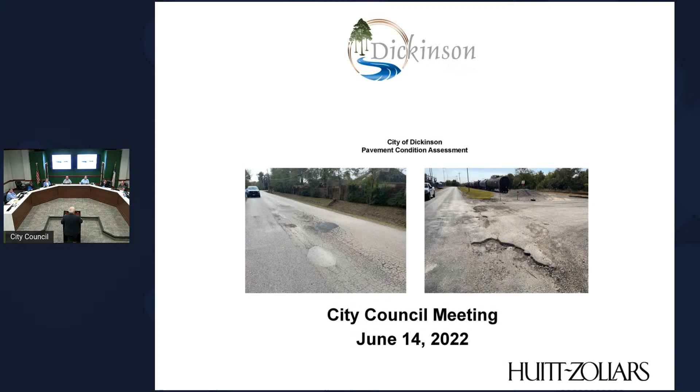The agenda: I'm going to cover basically the scope we were tasked with, talk through the scientific way we approached this and how we developed the city's deferred maintenance program currently on your roadways, how we then structure that in terms of planning a 5 or 10-year capital improvement plan, and how we would fund that based upon a life cycle analysis. I won't bore you with a lot of details, but let me tell you why this is really of the utmost importance.

Number one, you want to get your streets in the best condition you can afford for your residents. Second, the reason you need a program like this: I have dealt with FEMA here in the Houston area for the past 30 years, wrestling with them after disasters, whether it be the record flood in '94 up on the Lake Houston Dam, or Tropical Storm Allison, or Hurricane Ike and Hurricane Harvey. And the first thing they always say when you sit across the table from them is, prove to me what the condition of your facility was before the event occurred. That is the hardest thing to do, and honestly, that's kind of their way out of funding any improvements.

I worked with a gentleman who came to work with me, Joe Myers, who was a client for 25 years at Harris County Flood Control District. We used this same program on flood control infrastructure, 3,000 plus miles of channels, and we were able to develop what the condition of those channels were. When we had follow-on Ikes and other storm events, we got money from FEMA because we could show them what the condition of those assets were before the event and what they were after.

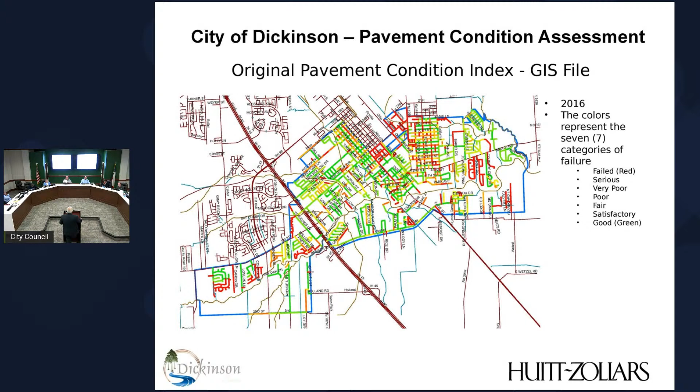You can see in '16, green was considered acceptable condition, and red was the failed condition.

We then took all the information, and you can see there's a pretty substantial change in the green. That means in those 5 years, the city did a lot of good work to improve the condition of the streets. So we updated the database, and then we went out.

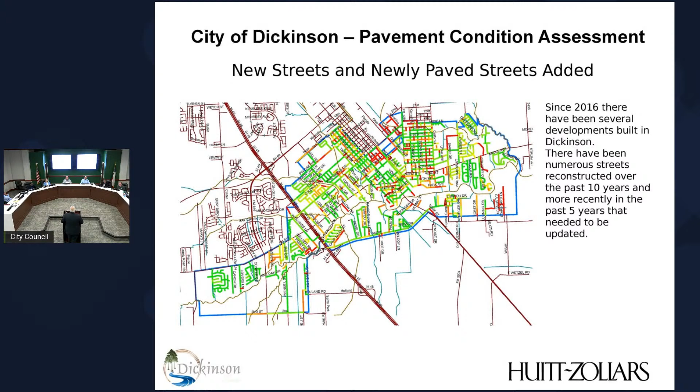In November, we then started taking a real deep dive into the streets and identifying which ones still needed to be reconstructed.

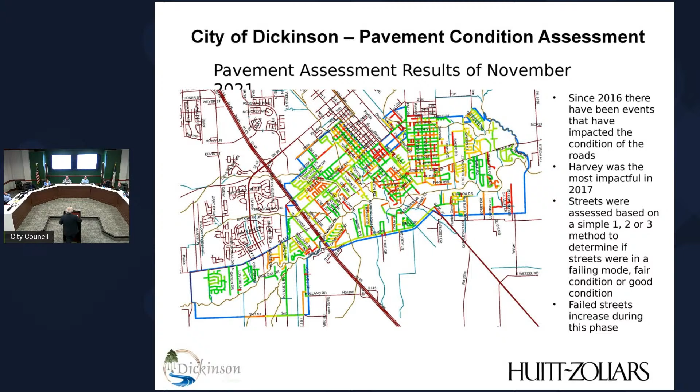The other item that we did: some of the streets that did not need to be fully reconstructed still had potholes and other deficiencies, spot repairs that needed to be done. So we went out and identified those deficiencies and created individual deficiency reports.

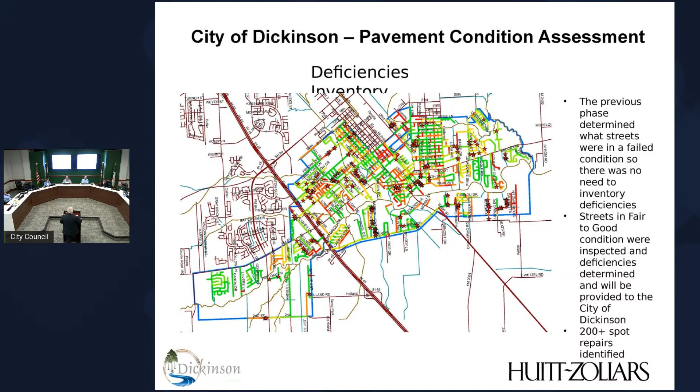Now, the nice thing about this is your staff can use these and actually create bid items for contractors, and they can go out and repair these, or the city staff can do that. The thing is, we have a record of the improvements that are being made, so when we get back with FEMA and we have damages, we'll be able to show that things have been repaired.

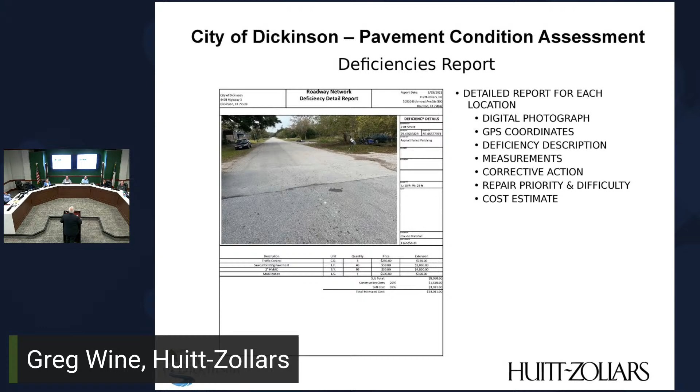We did this pavement assessment system on an iPhone, and we have since given that application to city staff. They can go out and update existing deficiencies as well as identify new ones, all done with a little pull-down app on their iPhone, and they're all able to do that now, giving us real-time information.

And the nice thing is, once they're repaired, the inspector can go out and say that has been completed. So it gives you that record again that we go back to FEMA to say we have been maintaining our assets.

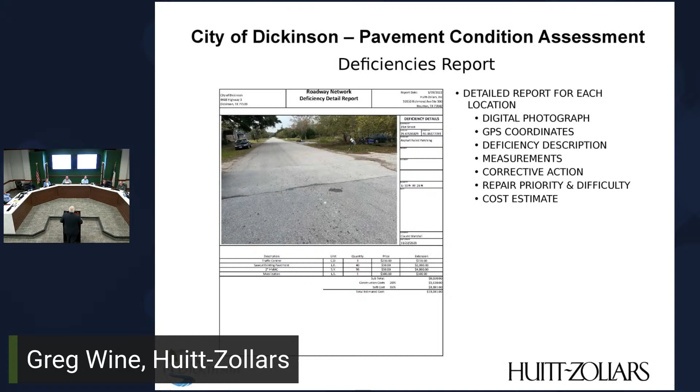Now, having arm wrestled with contractors over the past 5-6 months with what's going on in the economy, your value has probably gone up. But so has the value for the deficiency. So comparatively speaking, you have around $200 million in terms of value for your roadway asset.

You take the 192 and divide it into 84, and it says that right now the roadway condition index, in other words the status condition of that asset, all the roads, is about 43.7, which means it's around 43.7% deficient. So what this does, it at least defines the challenge that we have in front of us.

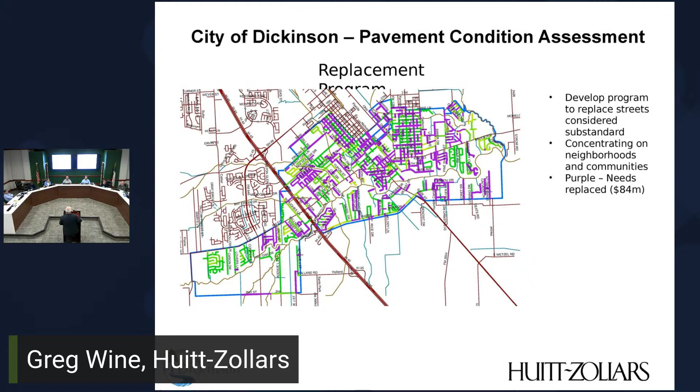And we're doing that right now, sitting with Theo and Chase and the rest of the staff. We have these projects, these roads, which are all purple, currently under design, and we're going to look at getting those prepared for construction and funding as monies come available.

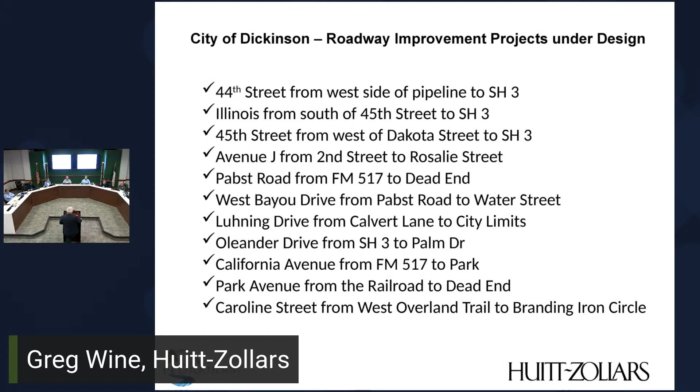So with that, that concludes my presentation. I'm welcome to answer any questions you may have. Does anyone have any questions?

No question. I just want to make a comment having to deal with FEMA on the Galveston County Long-Term Recovery Group.

I concur with what you said. Watch FEMA deny many a city because those plans aren't on file, the documentation is not on file. And while some may feel like this is not a good use of resources, I feel it is ultimately a good use of resources to bring in people to make sure we have these plans on file, so that we have proper documentation, proper plans in place, and it's that much easier to fund things without having to resort to other ways to take care of these pressing issues.

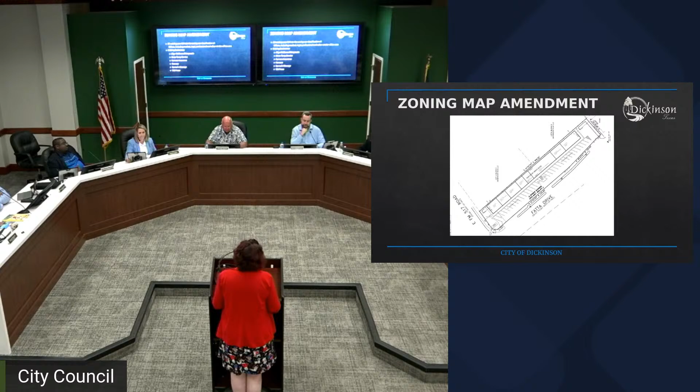Currently, inside the strip center, there's a chiropractic, insurance, and a mortgage company. All of the existing businesses do fit the neighborhood commercial zoning district, and that's what staff has found.

If I can just follow up real quick — Yvonne did a great job on this. What I do want to point out to the council is that this is already a non-conforming use, in the sense that for some reason this parcel was zoned residential, and it's never going to be that way.

It's going to be this neighborhood commercial with these uses, and I'm sure you probably know the little center is kind of one that's not facing 517, but facing the drive. So what I was going to say is that really what this does, if you're talking about being business friendly and being able to take some of the red tape out as tenants are moving in and out, is let them already pretty much be able to get into the place.

Because as long as they're under neighborhood commercial — but they do have to get a determination from the zoning official before they could move forward — what this does is say, look, we know that this is neighborhood commercial, zone it this way so that we can skip a step, start cutting a little bit of the red tape so that we can get people moved in business-wise. Thank you. Do we have an applicant presentation for this?

Come on up, sir. If you could give your name and your address, please.